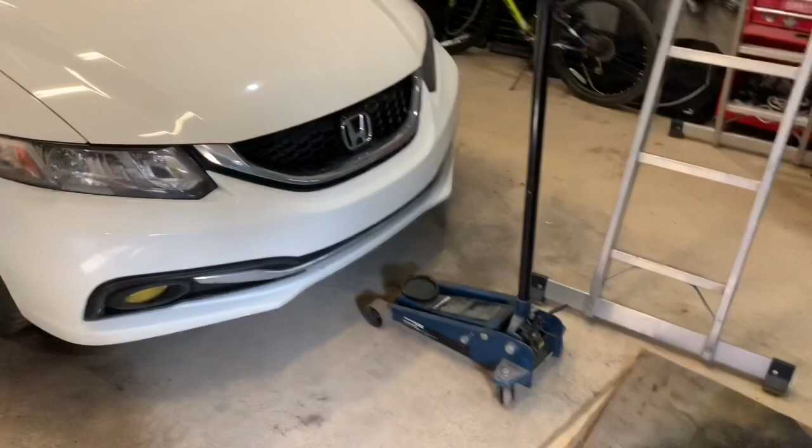So let's first, before we start, talk about jacking points and where we need to jack the car up. So we have different options. We could jack each corner up individually, get a jack stand underneath. Always use jack stands, guys. Don't rely just on your jack. Even if you're not going to be under the car at all, you don't want your car to fall on the ground and damage. Put a jack stand underneath.

So we can either jack up each individual corner, put a jack stand, but luckily on the Honda Civic, there is a jacking point underneath the car. It is made for jacking. And if you look at the splash shield, it has arrows pointing to it. So I'm going to go under the car with a flashlight so you guys can really see where it is. And that will allow us to jack up the whole front end of the car in one push of the jack. And then we could put jack stands under the corners. So let me show you that right now.

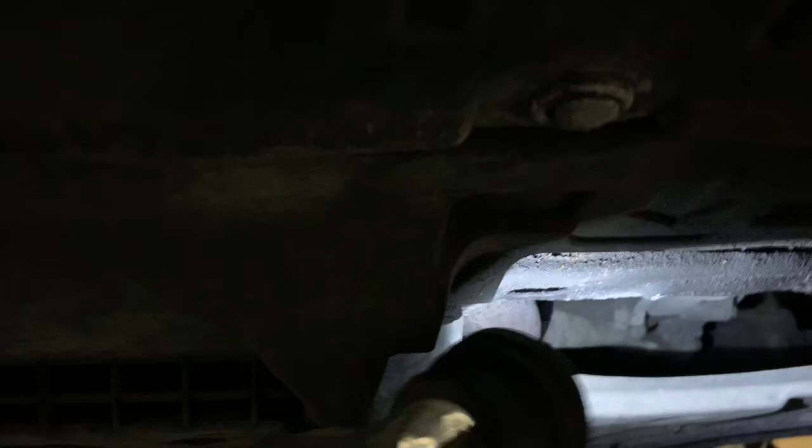Okay guys, so this is the front of the car, right? As we come right in the middle of underneath the car, you're going to look underneath. You see the plastic here? That's your splash shield. You go a little bit further down underneath. I'm going to try to put the light on it the best I can for you. We're going to show you where that jacking point is. And it is right here. Let me see if I can get it for you. There's a big piece of metal right here.

And if we look on the splash shield, sorry about the jittering camera, I'm going to try to get the lights for you here. If you look at the splash shield, you see that arrow? So right in the middle of the screen right now, there's an arrow on the plastic pointing to that piece of metal, which is right here. And that is a jack point. So we could put our jack right on that, center it on it, start jacking up, and the whole front end of the car will come up. So that's something good for you guys to know, so you could get the whole front end up and work on both wheels without having to jack up each individual corner. So let's save energy and do it that way.

Okay guys, so we have the jack under the car and we have it in position, but we haven't started lifting yet. What we want to do first is loosen the lug nuts. In my particular application, my lug nuts, and it should be stock for all Civics, are 19 millimeter. It's just a bit of safety. We don't want to loosen them when the car is up in the air. The extra force we're putting could cause the car to fall off the jack or the jack stands. Very unlikely, I don't think that would ever happen. You'd have to really shake it. But, you know, let's just play it safe.

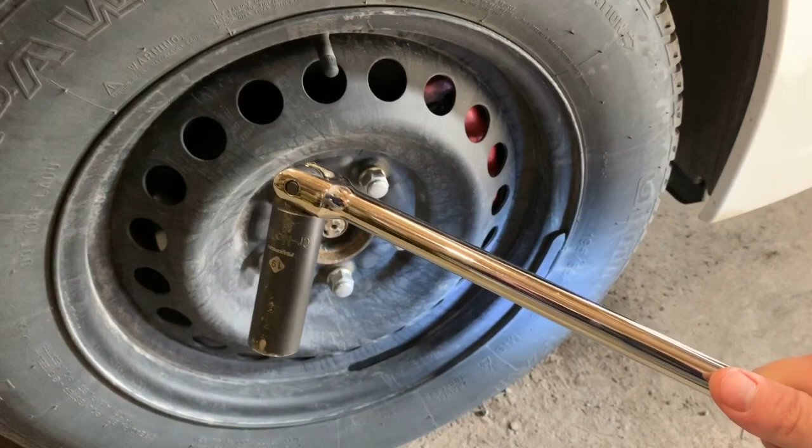So we're going to take our 19 millimeter socket. You could either use your impact gun or you could use a large breaker bar. I'm not pulling out my impact gun for a brake job. I don't mind using my breaker bar to break them free. And then I take my impact drill with my socket and zip them off quickly. So when we're loosening the lug nuts, we're not taking them off. Remember, the car's still kind of on the ground. We have it lightly supported by the jack, but we just want to loosen them up so we're not fighting with it when it's in the air. Like any time you remove or put on lug nuts, you want to do it in a star pattern. We don't want to cause any possible warpage of the rim.

If we start loosening, say, all the top ones and only the bottom ones are holding, it could cause it to bend. Once again, unlikely, especially when loosening, but this is the way we like to do it. So we do it in a star pattern. So we could start top. When we have 5 lug nuts, this is how you would do it: top left, bottom right, top right, bottom left, and then the bottom one.

So as long as you're doing it in a pattern that's opposing from each other, right? So you could do it this way, bam, bam, bam, bam, bam, right? Just the way we do it. So I'm going to go ahead and loosen both sides. Going to be working on both sides at the same time. And then we'll pick up the video and I'll show you what the next steps are.

So we have the car jacked up. Both wheels are off the ground. Like we said, safety first. So we're going to want to slide our jack stand underneath. So you're going to put that under the car. And you're going to see on both the front corners and the back, there's what we call a pinch weld. There's a little ridge that runs down underneath the car.

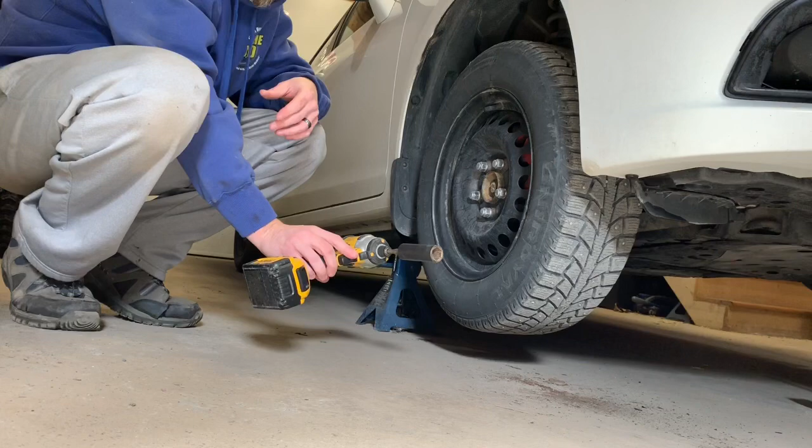Now to remove the wheel, we've already gone ahead and loosened it with the breaker bar. I like to use my impact gun with my socket on it. So you get yourself a socket adapter for 1/2 inch or 3/8 or quarter, whichever one you're using. And you put your 19mm socket and you zip off your lug nuts. I find this is the quickest way. I don't have to break out my pneumatic impact gun. Noisy, it's a hassle. For a job like this, not needed.

Now, these are winter tires. So here in Quebec, Canada, we have to use winter tires. These are my winter tires. And because it's winter, there's corrosion. So the tires sometimes don't want to come off easily. And that could also obviously translate to the brake components as well, but we'll get to that part when it comes. So if we need to remove the tire, sometimes it won't just come off. You got to give it a good kick.

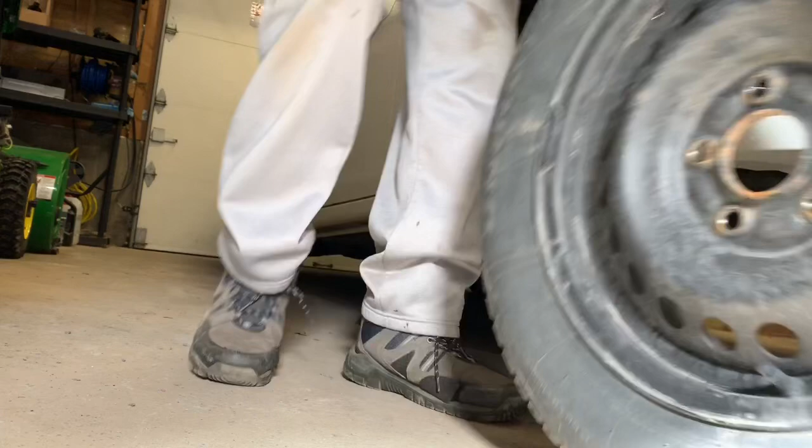So what I like to do is get in behind it, take my foot on the sidewall of the tire, and just give it a good smack. And it comes right off. Not as graceful maybe as I was hoping for the video, but she's off. And we can roll our tire out of the way. And now we'll take a look at the brakes themselves.

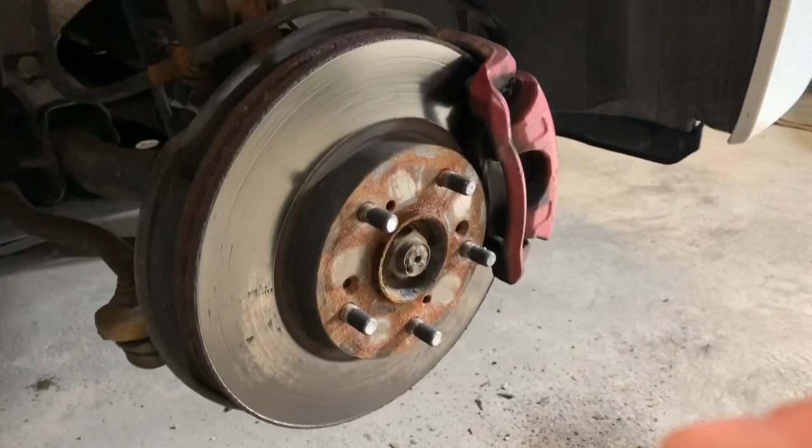So here's the brakes we're going to be changing. Here's the disc. So these brakes are 3 years old, and I'd say I probably got about 80,000 kilometers on these brakes. Maybe not 80,000, maybe 70,000. So could they live a little bit longer? I think I probably still have another summer in them. But you know what? I'd rather do it now. I'm in here doing maintenance anyways. Let's change the brakes now.

So the first bolts we're going to have to remove are the caliper to caliper bracket bolts. So these are these little bolts back here that screw into the caliper slide pins. These are 12mm. They're not torqued on very much. I think it's around 20 to 25 foot-pounds. Don't worry guys, all torque specs I'll be giving you when I'm reassembling. So you'll have all those torque specs.

So 12mm, we have one on the top and we have one on the bottom as well. You can see it right there. Camera doesn't want to focus, but it's right there.

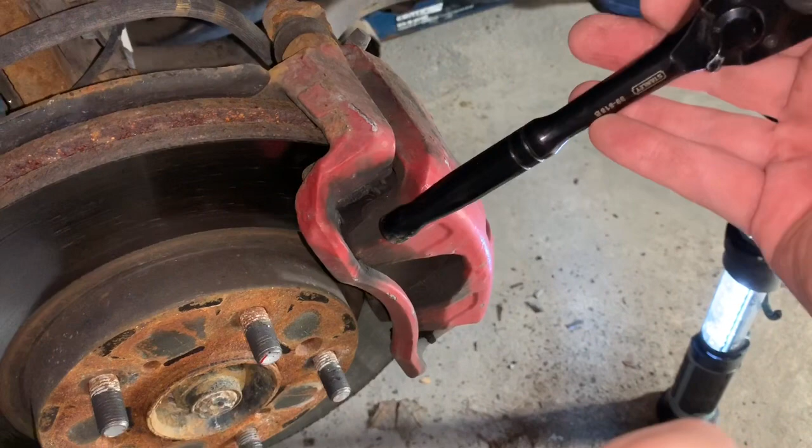So we're going to have to remove both of those, and that's going to allow us to swing the caliper up off the brake pads and the caliper bracket. So this is a caliper bracket. That's our caliper. Brake pads are in there. So once we undo those bolts, this caliper is going to swing right up.

Now, if we were just doing brake pads and not taking off the rotors, we could actually just undo the bottom one, loosen the top one, swing the caliper out of the way, change out our brake pads. But because we got to remove the rotor, we have to remove the caliper. We have to remove the caliper bracket to allow us to slide the rotor off. Okay. So we're going to go ahead and remove those two.

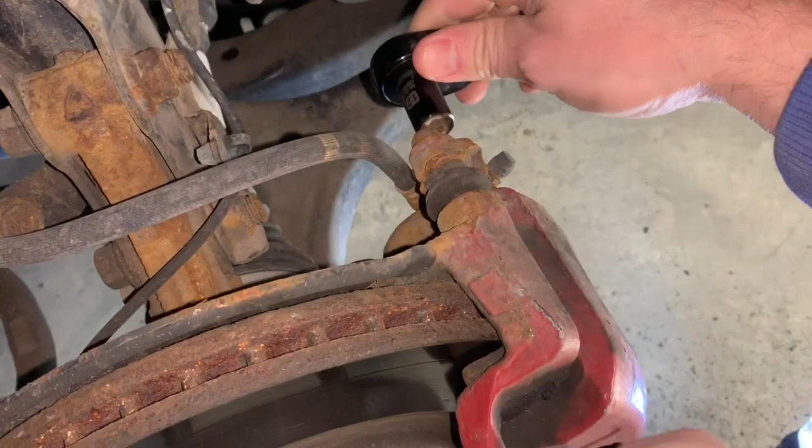So I always like using a 3/8 drive ratchet with the 12mm socket. But on the Honda Civic, you do have a lot of room back here. So you can use a 1/2 inch, 1/4 inch might be a little small, but they aren't torqued on very much. So you shouldn't have too much problem with them. So you just give it a little knock and she will loosen like that.

She's loose. Now, before you remove completely the top one, let's loosen the bottom one. Because if we remove the top and we try to loosen the bottom, the caliper is going to pull away and it's going to make our life difficult. So don't remove it, just loosen it, get it loose, keep it in there, remove the bottom one. So let me go ahead and remove those two bolts, and then I'm going to show you what you need to do.

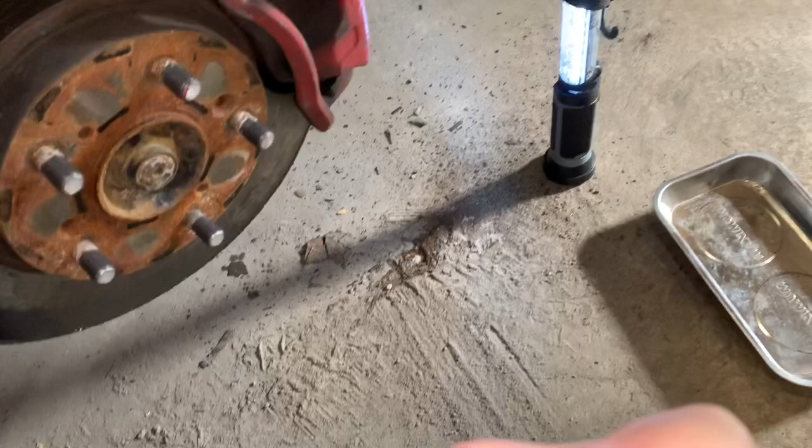What I suggest you guys get, if you don't have, is the magnetic tray. So you can put all your screws and fasteners in there so you don't misplace them. Trust me, if I was doing a brake job in my wife's car yesterday, things get dirty, a screw or bolt falls, it's easy to misplace, rolls away. Just get yourself a magnetic tray. I love mine, comes in very handy. So I'll be right back with you guys.

Okay, so those two bolts are out, and now we're going to be able to slide the caliper off.

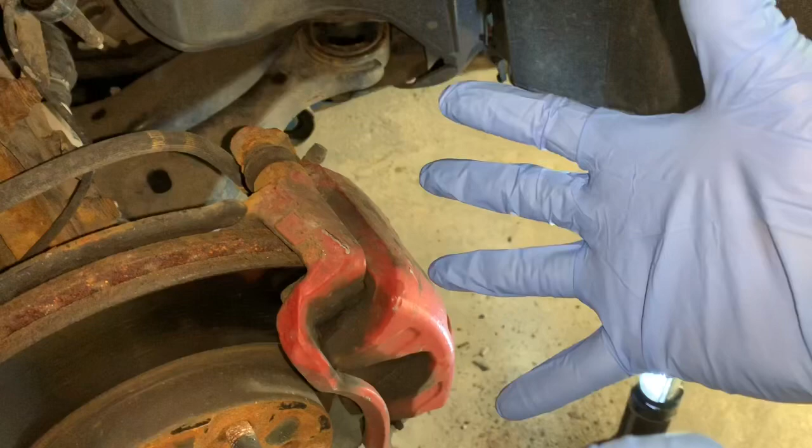Yes, guys, I'm wearing gloves. There's a YouTube channel I like to watch. He's a plumber. Steve, I hope I'm pronouncing his last name right, Laramere, I believe. I think he's out of Boston. Funny plumber. Love watching him, and he always wears gloves, and he always says, "Why do I wear gloves?" when he's changing a toilet and you see all that grime. That's why he wears gloves, and that's why I wear gloves, guys. I'm tired of years of mechanics getting my hands all dirty and greasy. It's not my full-time job. Don't want to go to work with greasy fingernails, so I wear my gloves.

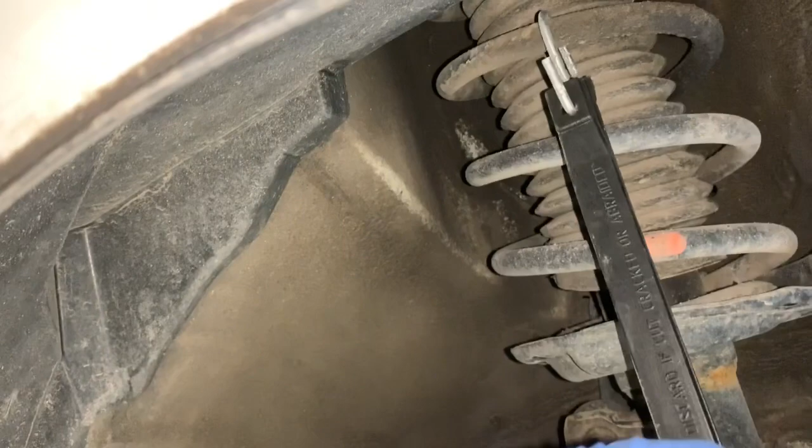So we're going to take this caliper and slide it up, pull it off of the brake pads and the caliper bracket, and get yourself a bungee cord to hang the caliper. Because once it's off, the only thing supporting it is the brake line. You don't want to leave it hanging from the brake line. That's not a good idea. So I like to take a bungee cord, get it up on the suspension spring, as high as you can. And then when we pull the caliper off, we could hang it from there.

So to get the caliper off, hopefully I can do this one-handed. And it's not going to let me, I bet you. Oh, there we go. Okay. Sorry, I don't know if you missed that. You pull it away. You see she comes off, right? And you're going to pull her off the brake pads.

It's free, okay? And what I like to do now is take my bungee cord and bring it in through here, or even through the hole where that bolt you took out is, and that'll hang it nicely, so it's not putting any tension on the brake line itself. So let me go ahead and do that. It's hard to do stuff one-handed, and my tripod's horrible. So I'm gonna go hang that caliper, and I'll show you what the next steps are.

So you can see the caliper's hanging from the bungee cord. There's no tension at all on that brake line. And that's the way you want to do it. So now that our caliper is off, we're going to remove the brake pads.

Before we do that, we have these two springs. Now in Hondas, it uses these little wire springs that go from one brake pad to the other. In case you don't understand how the braking system works, it's a floating caliper. Caliper floats, brake pads kind of just float. Once you let go of the brake pedal and the wheel starts turning, they release. And the velocity of the rotor turning spreads them kind of apart.

Well, these little springs help that even more to make sure the pads are not putting too much force on the rotor when you're not braking, as to not wear out the brake pads prematurely. So your new brake pads should definitely come with this. All the brake pads I've ever bought have. Maybe hold on to them just in case the really economy brake pads don't come with it. It's good that you have it.

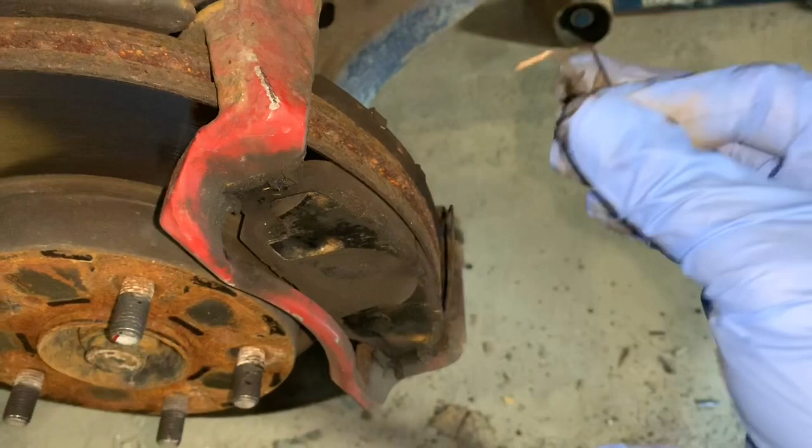Now, while I'm on this, we talked about economy brake pads. Now, I'm not one to judge. I know everyone's in different financial situations. But guys, this is the one thing that's stopping you. This is probably one of the most important components on your car. I don't know if you want to go too cheap on it. I'm not saying the economy ones are garbage, but they're $20 or $15 for a set of brake pads for a reason. Once again, just my opinion.

I'm not saying go out and buy the most expensive high-performance brake pads, but get yourself a good set of brake pads and a good set of rotors, good quality by a reputable manufacturer. Just my opinion. I like Raybestos, and I'll show you which ones I go with. And you guys make that decision yourself. But once again, I have my kids in the car, my wife in the car. I want to be safe. But just my opinion. I'm sorry if that offends anyone.

So with those wires off, we can now remove the old brake pads. And these come right off. And we could put those aside. That's the front brake pad. Rear brake pad comes off. And now all it's leaving us is the caliper bracket. So that's this big piece here. And it's going to be the same thing. We're going to have two fasteners on the back. So I'm going to stop the video. I'm going to bring the camera in behind so you guys could see what those bolts are.

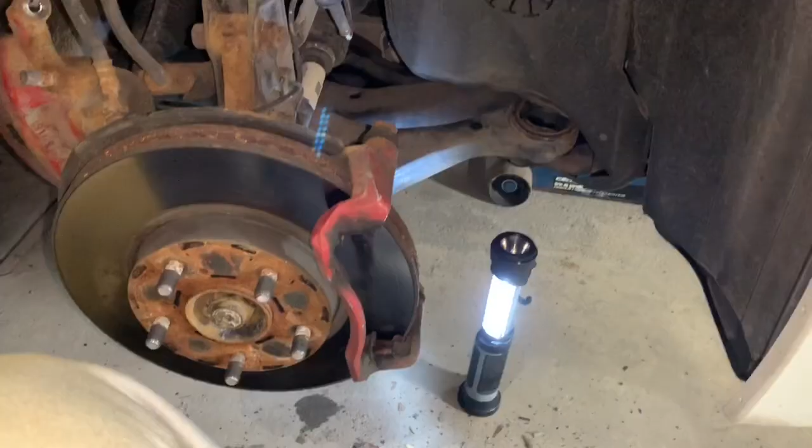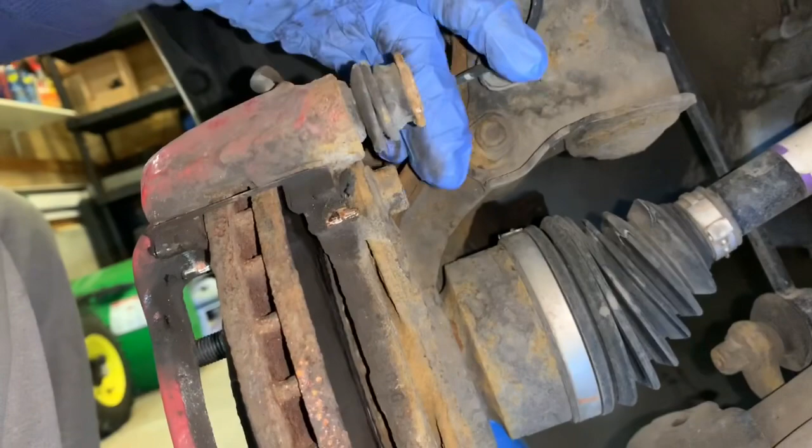Okay guys, I'm going to try to show you. I'm going to do my best to get my phone in behind there. I don't even know if it's going to see it. I don't even know what you guys are looking at because I can't see my phone, but hopefully you could see it. They are 17 millimeter bolts. There's one on top and one on the bottom right here. So we got to remove those two.

Now, those two bolts are torqued on. Once again, torque specs will be given on reassembly. I want to say at around 60 foot-pounds. They're on there pretty snug. So I like to use a 1/2-inch ratchet. It gives me a little more length on it. You could use a 3/8 if you have a longer 3/8 ratchet, like an 8-inch or 12-inch, to give you a little more leverage to really get those off. So I'm going to go in there now, remove those, and then I'll show you what the next steps are.

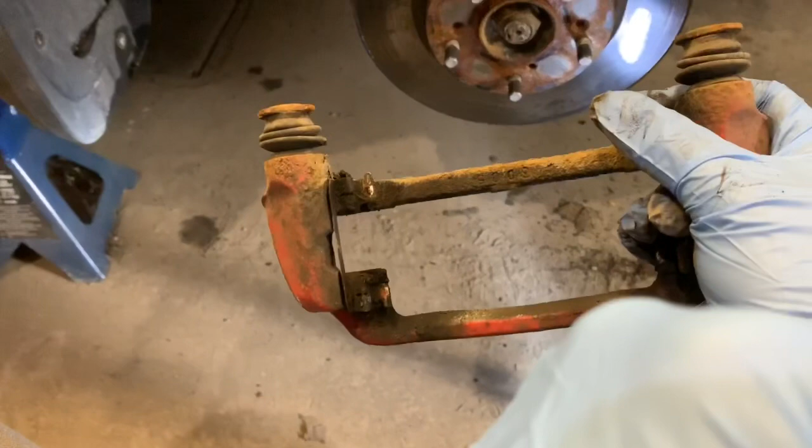Okay guys, so I removed the caliper bracket from the steering knuckle by removing those two 17 millimeter bolts. And here you can see the bracket. Later in the video, I'm going to go over how to disassemble it, service it, clean it, lube it up, but just basically so you can see what it looks like. You have your slide pins over here with your rubber boots. So those we're going to be removing, and I'll show you what needs to be done to those.

We also have our stainless steel shims where the brake pads make contact on the bracket. The stainless steel shim is there for a reason. If you had the brake pad ear, which is steel, on steel, which is the caliper bracket, corrosion would cause it to seize up. So you have a stainless steel shim that's in there. We put a little bit of lube as well. And that won't allow for any corrosion and will allow the brake pad to always move back and forth.

As you brake, move it in to brake. As you release, move it away. It allows it to slide easy. So that's why you have those shims. Once again, a good quality brake pad will come with the shims. If not, definitely keep these. Usually they're not in bad shape. If you clean them up, you could definitely reuse them. But anyways, I'll go over later in the video how to go about cleaning this, taking it apart, putting on the new components. So I'll put that aside for now.

So once we have the bracket off and the calipers off, the only thing that's left in our way now is removing the rotor. There's nothing else holding the rotor on. Now, I've changed these brakes before, so I don't have any retaining screws. From the factory, there are 2 Phillips head screws that basically go through the brake rotor into the hub, the back of the hub. Now, why are those there? Pretty much for assembly. When they're assembling the car, so they don't fall off as it's going down the assembly line, they put those little Phillips screws.

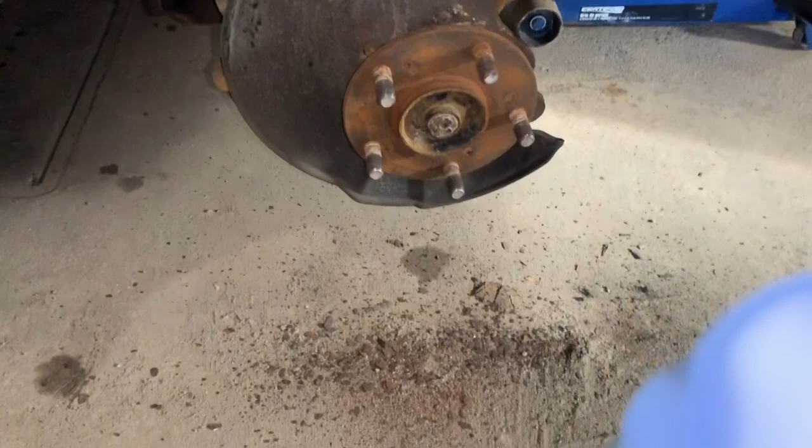So I'm going to put the camera down and I'm going to show you guys how I get it off with a hammer. Hold on, this is going to be fun. Sorry guys, I thought I pressed record and I didn't, so you missed me hitting the brake rotor with a hammer. Probably nothing entertaining anyway, so you didn't miss much.

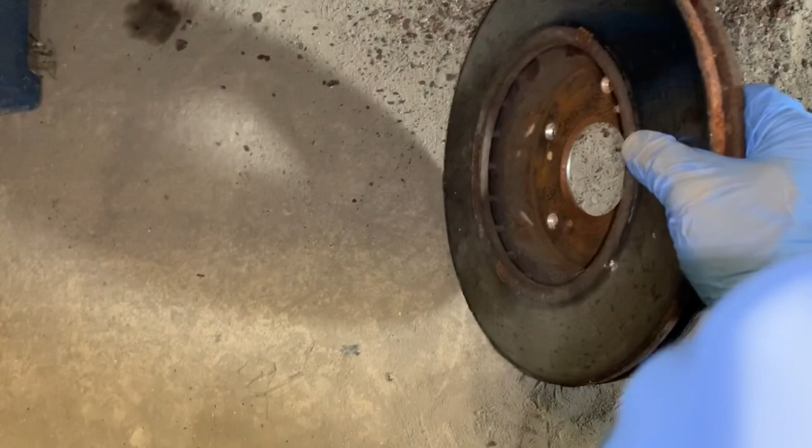So the brake rotor is off. You can see the hub and the wheel studs and the dust shield in behind. And here's our rotor. And I'm not going to lie, this one was a pain getting off. Not the worst one I've had, but it was a pain. And the reason that was is because if you look on the inside, you can see there's all that rust, right?

So if we look at the hub, which is right here, this fits almost perfectly inside that top hat of the brake rotor. So as this rusts and becomes bigger because of rust, it makes like a lip of rust. So when you're trying to pull the rotor off, it's kind of like fingers on here, grabbing it, won't come off.

So I did my technique, like I said, you hit it with a hammer in between the studs, put your lug nuts on not to damage your stud, to vibrate it, to shock it loose. It came loose, but I wasn't able to pull it off because of that ridge of rust holding it on like fingers basically. So what I had to do is keep knocking.

And then what I did is, because we have this big empty space here, from in behind, I would give it a couple of taps, turn it a quarter turn, give it a couple of taps, and basically slowly press it off from behind. So in this example, those two threaded bolts through the top hat of the rotor, pushing against here, basically pulling your rotor off, would have been a good solution.

But it worked well for me. Just tap, tap, turn, tap, tap, eventually slowly working it off until it broke free of all the rust and it fell off. So what you want to do now, there's not much prep to do here, but what I like to do, sorry if I'm shaking the camera, is clean the hub.

So take a wire brush and get a lot of this rust off. There's not much, but still get it off. Go around here from the lip of the hub, clean it up. You could even use a pneumatic die grinder with a wire brush, which is what I'm going to use, or just a hand wire brush, and clean up this surface here and even the mating surface.

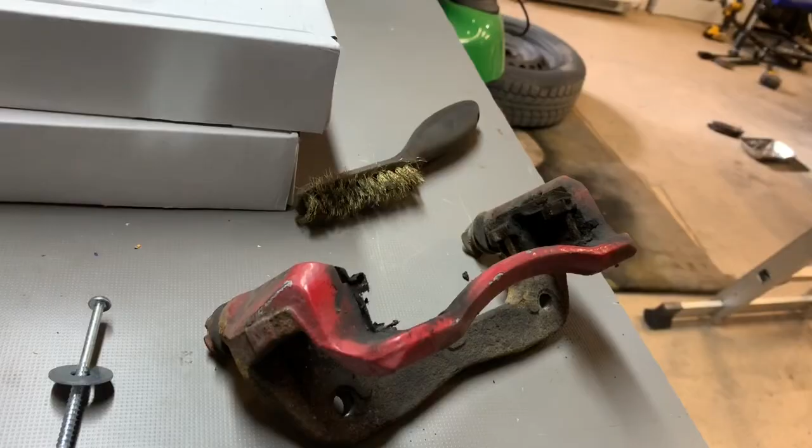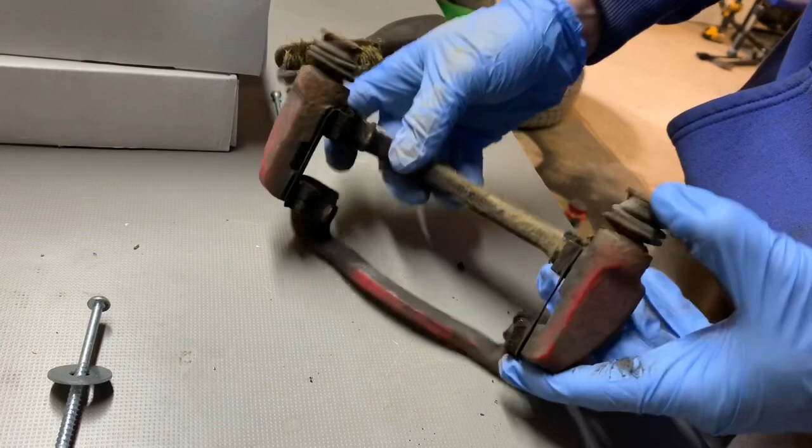Okay guys, so I cleaned up the hub and the mating surface where the rotor goes. And now we can concentrate on the caliper bracket and the components that are on it. So here's our caliper bracket. So the first thing we can do is remove these stainless steel shims. Like I said, if your new brake pads don't come with these, keep the old ones and clean them up.

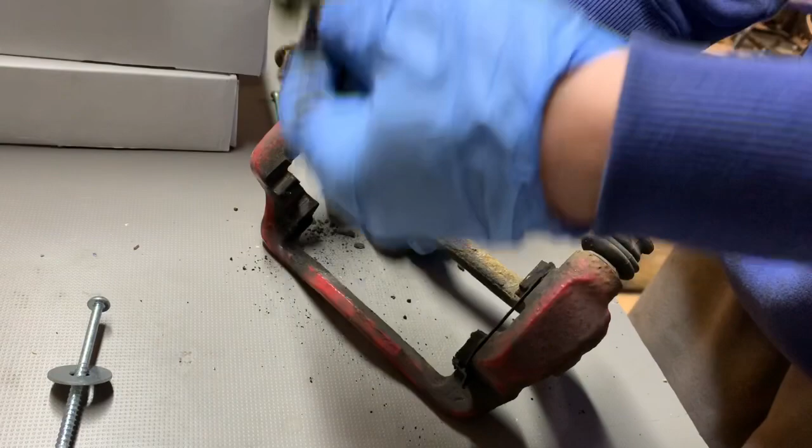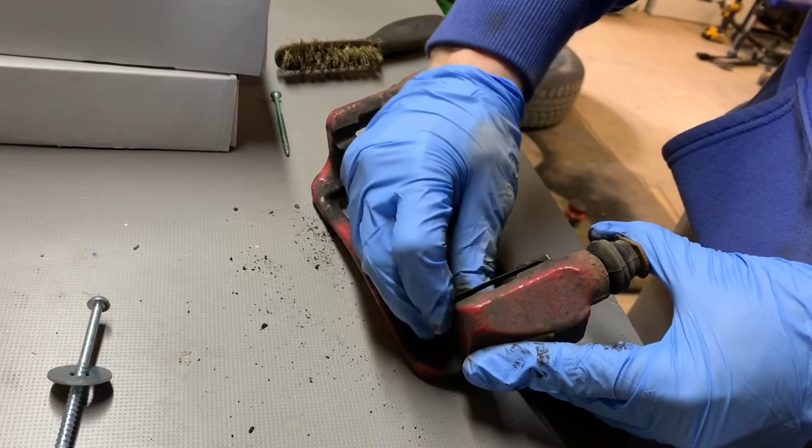But every brake pad I've ever bought comes with them. I can't speak for the super cheap brake pads. Maybe they don't. So keep them aside just in case you do need them. So there's a shim on the top and the bottom of the caliper bracket. So you're going to remove those.

And what I like to do next is clean up these surfaces, where the shim sits on. There is always a little bit of corrosion there, a little bit of grime, which could cause the shim to sit higher than what it's supposed to. If the shim sits higher than what it's supposed to and the brake pad sits in there, and it's already a tight tolerance for brake pads to cut down on noise, it could cause the brake pad to bind.

You might have trouble getting it in when you try to slide it into the bracket, or when you're braking, it might cause it not to move as freely as it's supposed to. So I like to clean up these surfaces. Just a wire brush, you go in there, give it a good cleaning.

Now, I do a brake service once a year. Well, technically I do a brake service twice a year. Every time I rotate my tires or change over my summer to winter tires, I re-lube all the brakes. I don't dismantle everything twice a year because that might be a little too much.

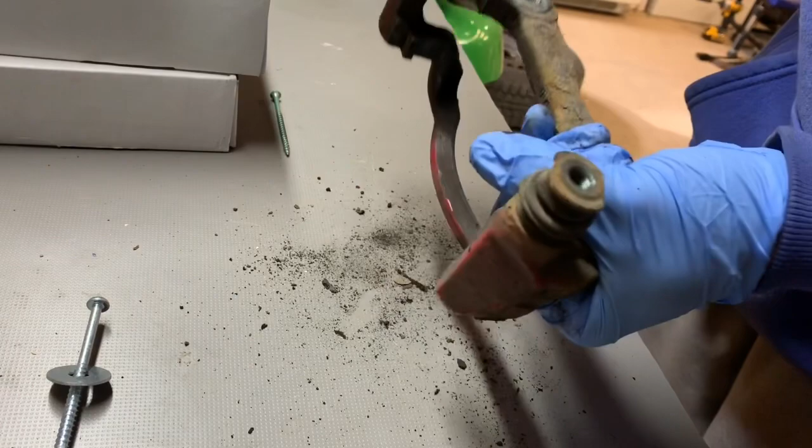But what I do once a year in the spring, if I'm not doing a brake job, I remove all this stuff. I remove the bracket, I remove the shim, keep it aside because I will be reusing the shim in that scenario. And I clean up all the surfaces, just get everything nice and clean. Like I said, here in our climate with all the grime and crud in the winter driving, it could cause issues building up on the brakes.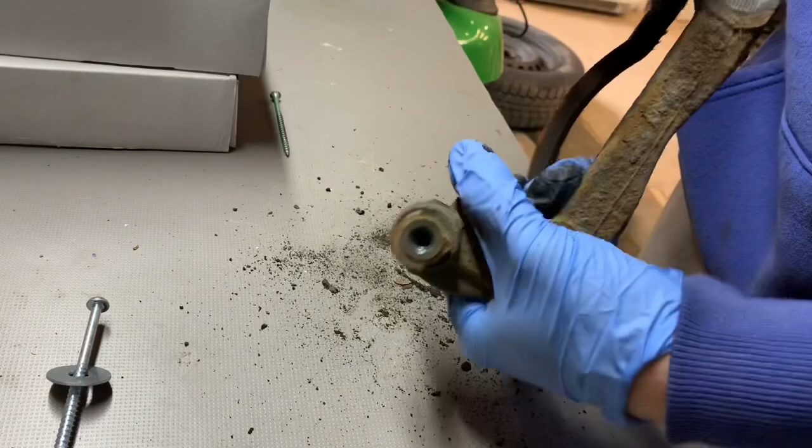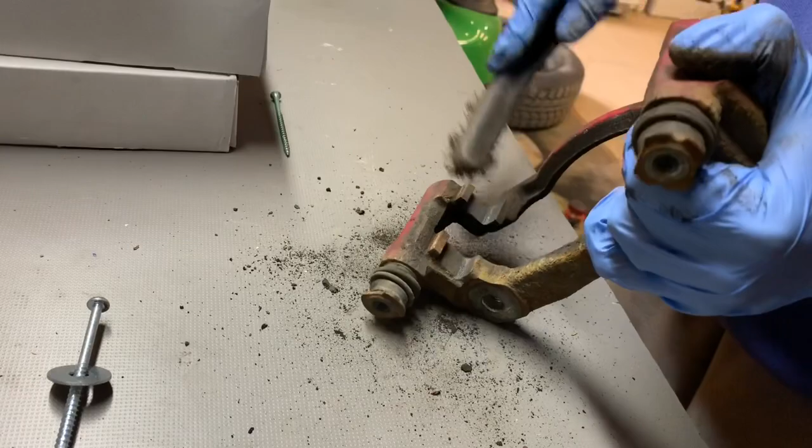As you see, a lot of people have seizing brakes, they have to go to the garage. Their brake pads might still have a lot of meat on them, but they need to be changed because their brakes seized up and it caused the rotor to be damaged, the brake pad to prematurely fail, say the inner pad might wear out a lot more than the outer pad. So by doing a little bit of brake maintenance once a year, well, twice a year, but a big maintenance once a year, it'll save you that hassle.

So just with the wire brush, cleaning up that surface, and you can see now that it's nice and clean. And once we do that, the next step is our guide pins or sliders. So you can see there's a rubber boot over here. So we pull back the rubber boot, and that frees up that guide pin or slider, allows us to pull it out.

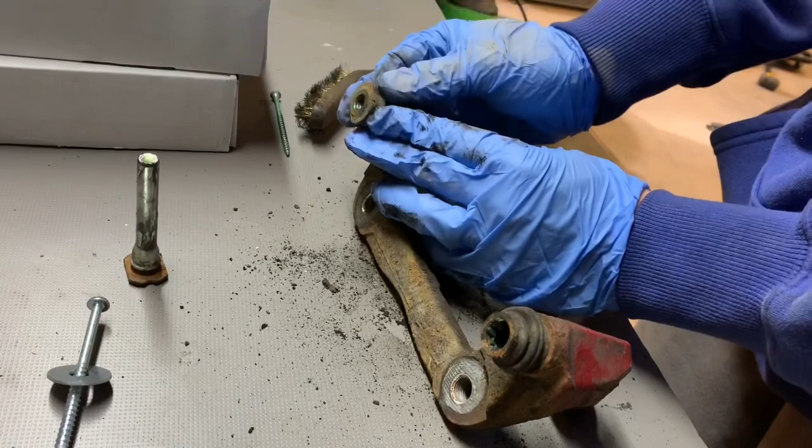So there's the bottom one. It's bottom, right? Yeah, it's the bottom one. And now we're going to do the top one. We're going to slide it out. Now the top one's going to be a little bit harder to pull out. And I'll show you why.

Because on the top one, you have a little rubber bushing, I guess you could call it, on the end of the pin. And that's to cut down on noise. Because it's a floating caliper, basically it acts as a buffer, so the caliper is not shaking inside the bracket and could make noise when you're braking or even when you're just driving, going over bumps. Does it really cut down the noise that much? I don't know. But that's why it's there.

The problem is with this rubber, it doesn't like caliper grease, brake grease. It swells. And as you put brake grease on, this bushing swells and could actually cause the pin not to move freely inside. So something to keep in mind, these are changeable. So you could buy a kit. I don't think you could buy just the bushing, but it comes with the boots as well. I think it's like $10.

I think probably for both calipers that you could redo it. I just redid it last year, so I'm not going to do it again. But it comes with new boots, new bushings. The guide pins are pretty much good for life, unless they get damaged for whatever reason. Normally you don't have to change them, so you don't have to worry about that.

So we're going to take out our guide pins, and we're going to use some brake cleaner with a rag. We're going to clean up that surface, get all the old brake grease off. Another thing I like to do is spray brake cleaner into the bores of the brake caliper bracket where those pins slide in to remove any old brake grease, any grime that's in there, get it nice and clean.

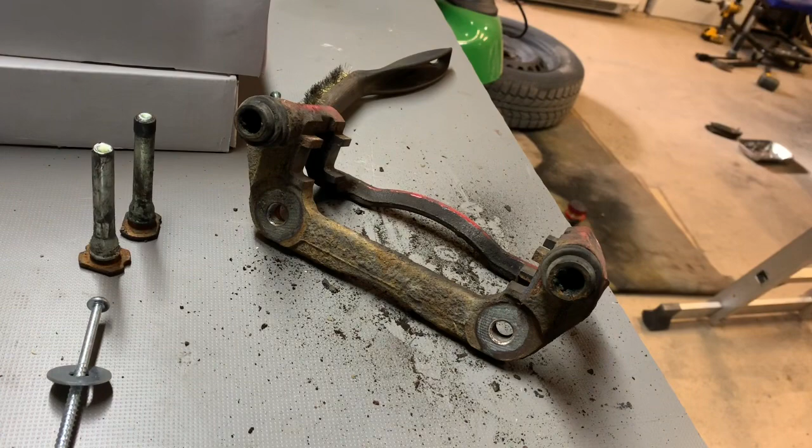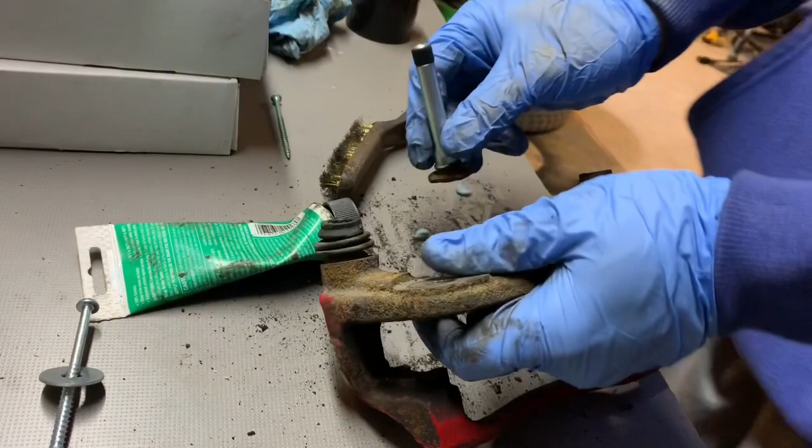Okay guys, so I've gone ahead and did as I said. I cleaned up the slide pins with brake cleaner, got all the old grease off. So both of those are clean. I as well cleaned out the bores of the brake caliper bracket, got all that old grime out. So now we're ready to lube up those pins to put them back in.

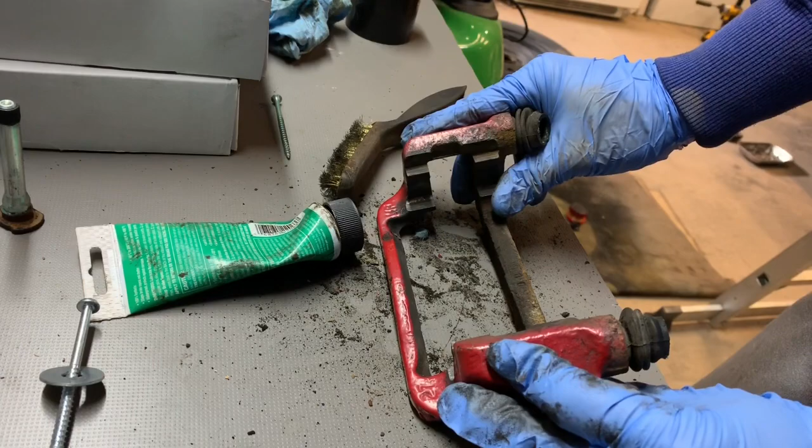Very important you use the right grease. You can't just use any regular grease like wheel bearing grease or general purpose grease. It doesn't have the heat capacity that's required for brake components. You need a high heat brake grease that won't liquefy under extreme heat. These brakes get really hot. You put a wheel bearing grease or an all-purpose grease, it's just going to turn to liquid. So you got to get yourself a brake caliper grease.

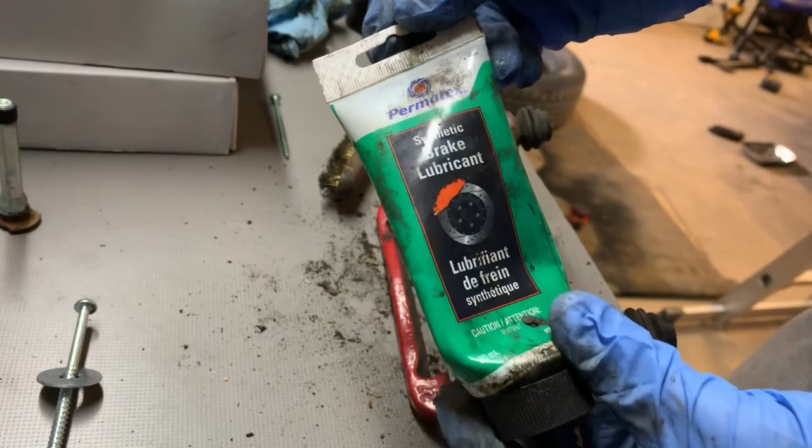I use a synthetic one. I use the Permatex, been using it for a long time. Comes in a little tube. I wish it came in bigger. I used to get it in a big tin. I can't find it anymore. If you guys know where I could get it in bigger volume, please let me know.

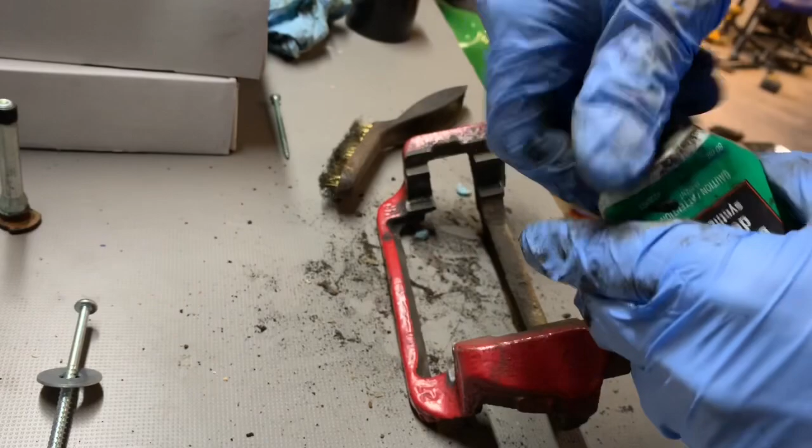So I use that. So what I like to do is I take my guide pin, take out a little bit of grease. You don't need much. Some people like to really over grease these things. Just put a little dab on your pin, then use your finger and spread it out evenly over the whole pin. Get all the surfaces.

And then what you're going to do, so we said the bushing's on top. Now, does it matter if that bushing's on top or the bottom? That's a good question. Don't think it does. Let me know in the comments if it does matter or what your opinion is. I always just put it on the top because that's where it always is when I do a first brake change on a car. So I'm just going with that theory, so to speak. So we know on this car, this is the top.

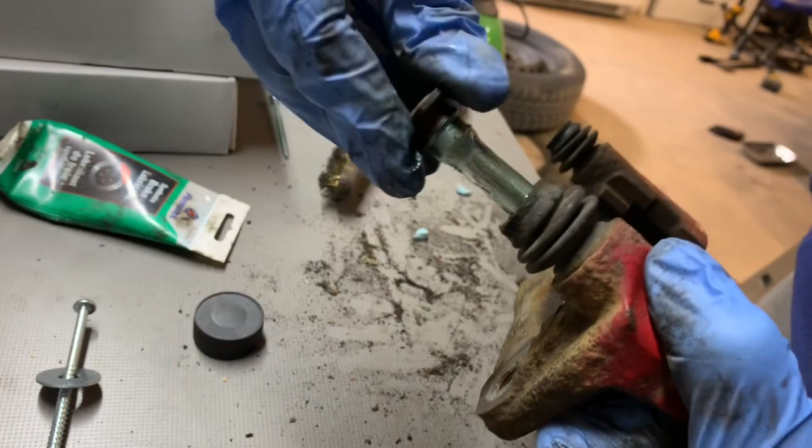So we're going to take our pin and we're going to slide it in. As I slide it in, I like to turn it a bit too, just to get that grease all over. And we slide it in and we push it all the way down. So you can see the tight seal that's in there. See, when I push it down, it wants to come right back out because the grease is basically forcing it out, not allowing the air to push through. So push it down and it's going to cause the rubber boot to reseat.

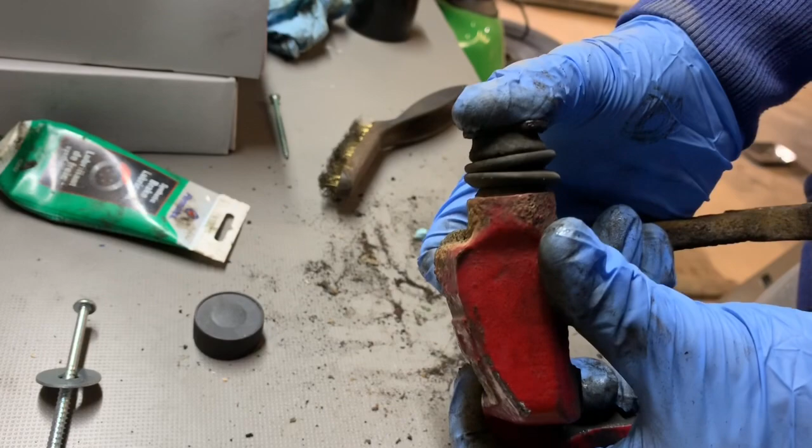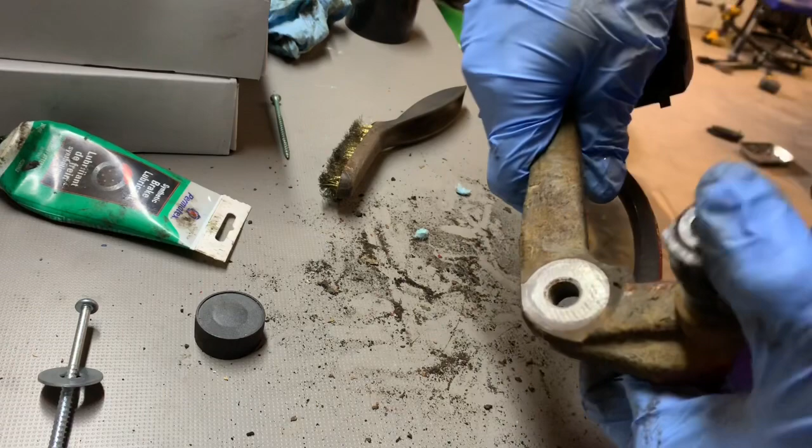There's like a little lip on the pin. See, if you look on the pin, there's a little lip that the boot sits into. So you can see there we go. We got it all nice and in. And now we're going to do the same thing for our bottom pin. We're going to lube it up, and we're going to stick it in. So I'm going to go ahead and do that, and then I'll show you what the next step is.

Okay guys, so we're going to now take our new shims that came with our brake pads, and we're going to put them in place. So there's no top or bottom, they're universal. So you're going to seat it on as such, and you're going to basically push down. So you're going to press it into place as such. You can kind of hear it, this clips in.

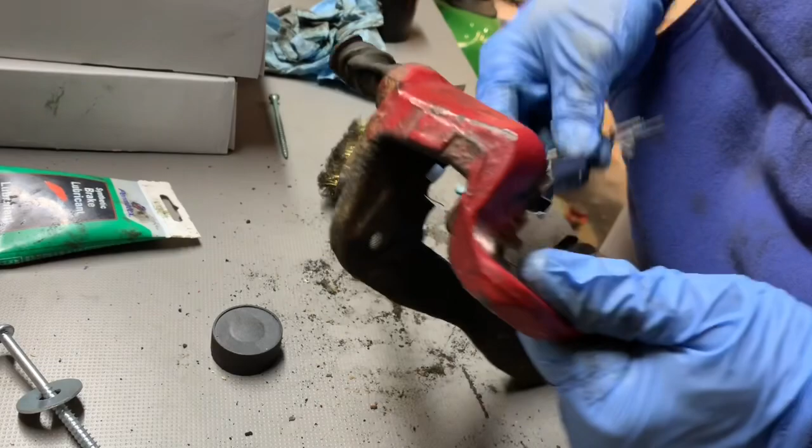And you're going to seat it in like that, and you're in. And now you're going to take your other one, and you're going to do the same thing on the top or bottom, depending which way you're looking at it. And you're going to push it down, and you hear it click in place, and you're in.

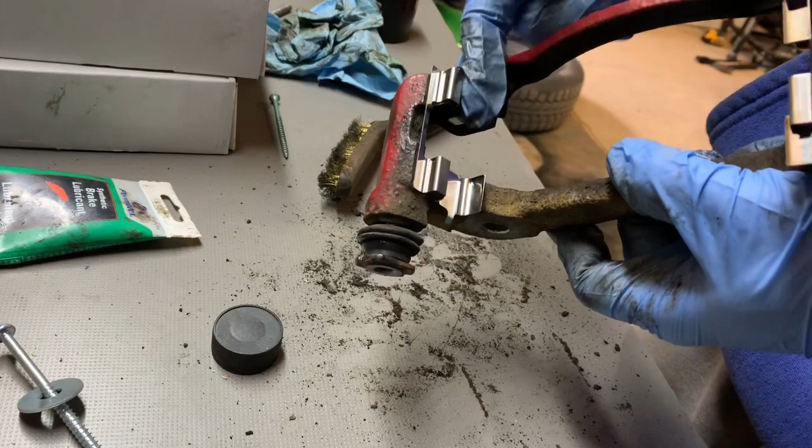Now what you could do is you could take a little bit of your brake grease, and you could lightly lubricate the surface of the shim inside the recess part, on the side walls, the little raised part. This is where the brake pad ears make contact. You want to have a little bit of lube there. You either put the lube here, or you can put the lube on the brake pad ear. Same thing will happen. I like to put a little film on the shims themselves to make sure they're well covered. And then I could slide my brake pads in.

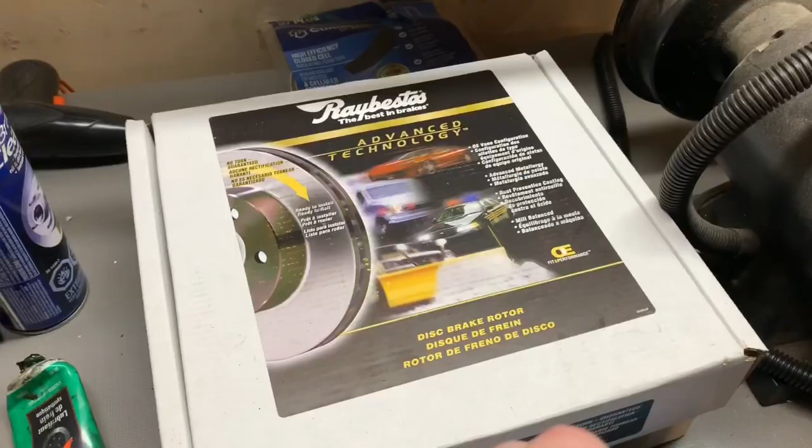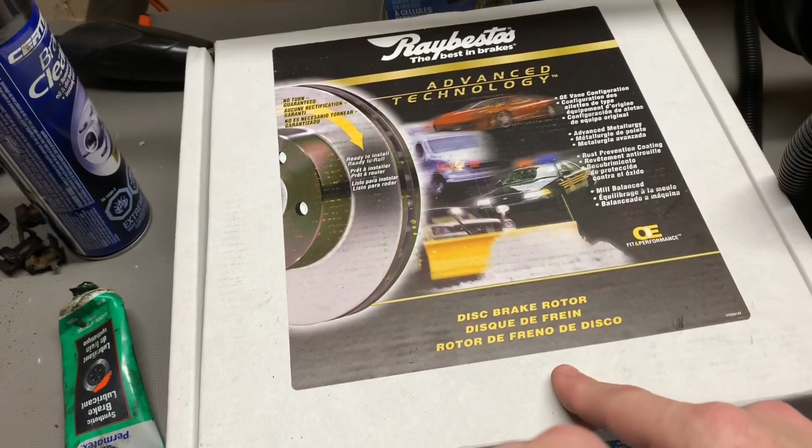So I'm going to go ahead now, and we're going to go back to the car, and I'm going to put the new rotor on, and I'm going to show you what brake components I purchased. So when we look at what brake components I purchased, once again from Rock Auto, I like Raybestos, and not the entry level, but more of the premium level brake parts. This is their advanced technology brake rotor.

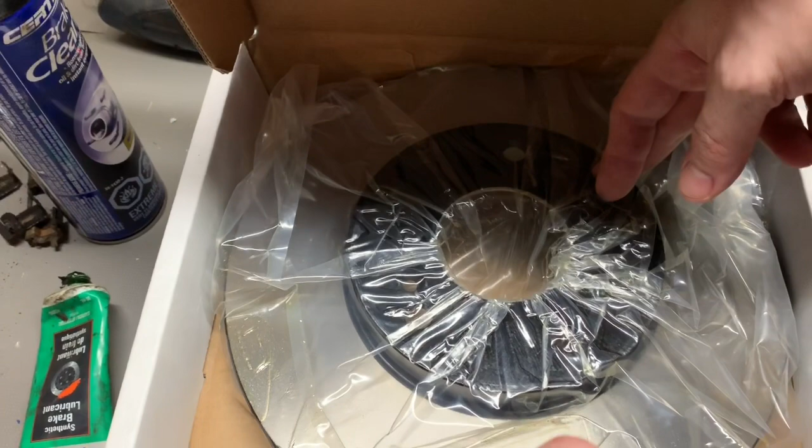So it has the coated top hat. So any part that's not braking surface is coated with rust inhibitor, and it's almost like a paint. It's nice and black, and it won't rust. It'll always look nice. So I like that technology. It has it on the outside of the hat, the inside of the hat, and even on the leading edge here, so you don't get all that crappy looking rust. And that also helps to make it easier next time you have to take it off. I think these were $50 Canadian a piece plus shipping. If you go to your local parts store, they're probably over 100.

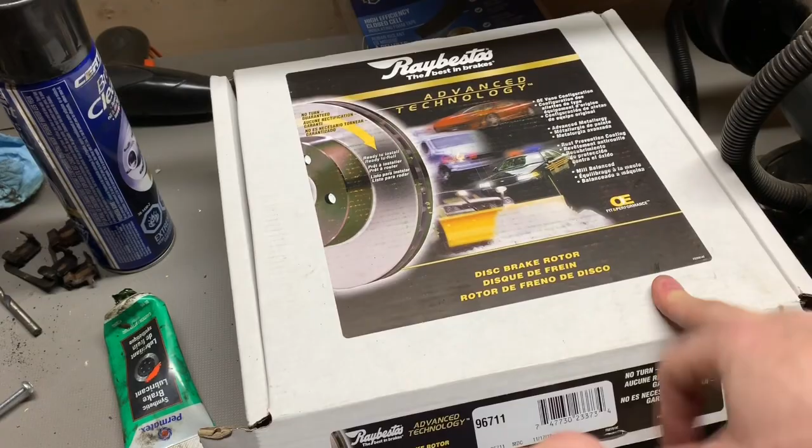I wouldn't be surprised. Brake pads, Raybestos again. I really like the Element 3. I've been using them quite a few times now with great success. They don't wear out prematurely. They're not noisy. I just like everything about them. They come with all the parts you need. They come with multiple shims. They come, like in my case, with those little wire spreaders we were seeing when I took the pads off. And I want to say these were about $40 Canadian plus shipping.

Worth the investment. They're not expensive. And really, I really like them. I've used them now twice on my car, twice on my wife's car. On my previous cars, always had great success with them.

So we're going to be putting the new brake rotor onto the car. Before we do that though, we need to clean it. From the factory, it comes with an oil film on it to prevent any kind of corrosion. So you need to wipe that off. So you take some brake cleaner, spray it, take a shop towel, wipe it off before putting it on the car. So the new rotor is cleaned, both sides, all surfaces with brake cleaner. Get all that oil off, and I've put it into place.

So the next step now is basically we're going to reverse what we did taking everything apart. So the first step we're going to do is put the brake caliper bracket back on. So we have those two 17mm bolts that we have to put on. Those are going to be torqued to 80 foot-pounds. Now what I suggest you guys do for torque specs, right? I mean, I'm putting it on the video so you guys don't have to research it. But here's what I did.

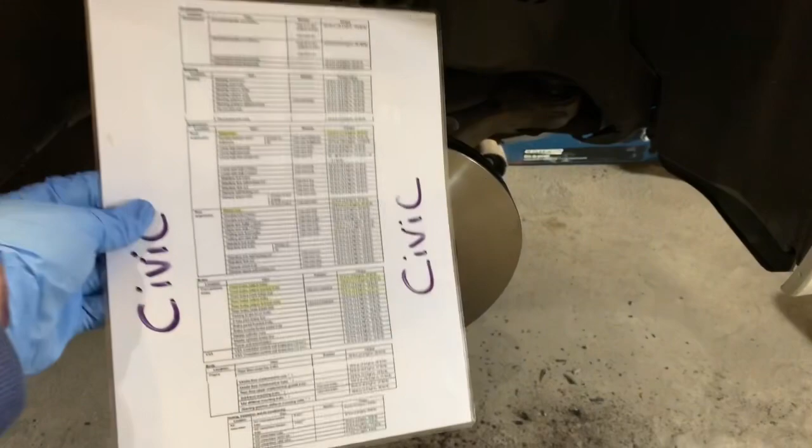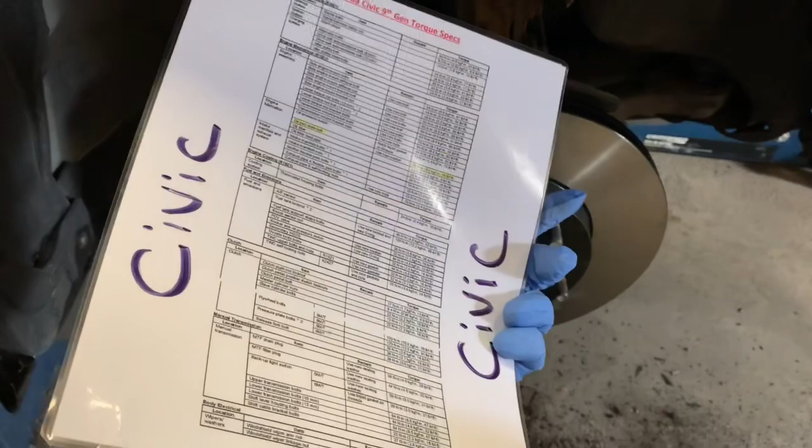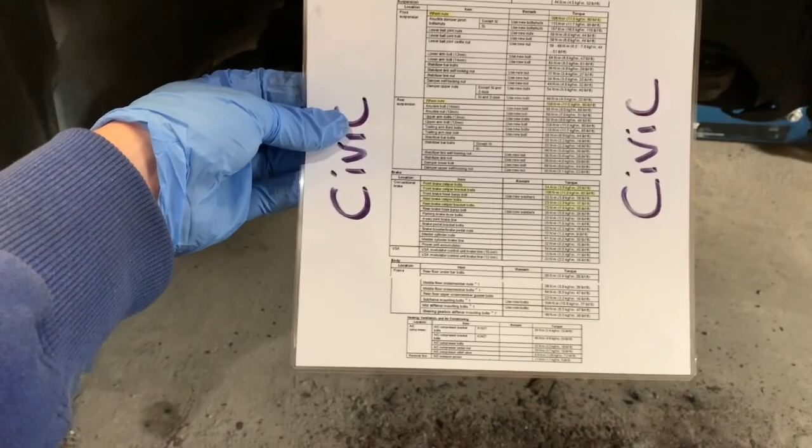I made myself a template, a laminated paper, it says Civic on it, because I made one for all my different cars with all the torque specs you could imagine. Look at all those torque specs, right? So most of them I'm never going to need, but I just copied and pasted them from online manuals. I highlighted in yellow the ones I use the most, so brake components, wheel nuts, oil pan, and such. So it's always on hand, readily accessible. I could look at it right away, and I know what torque spec I need to use.

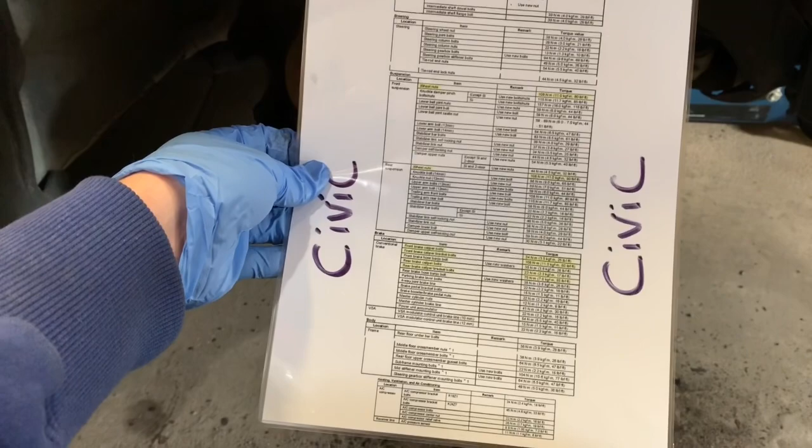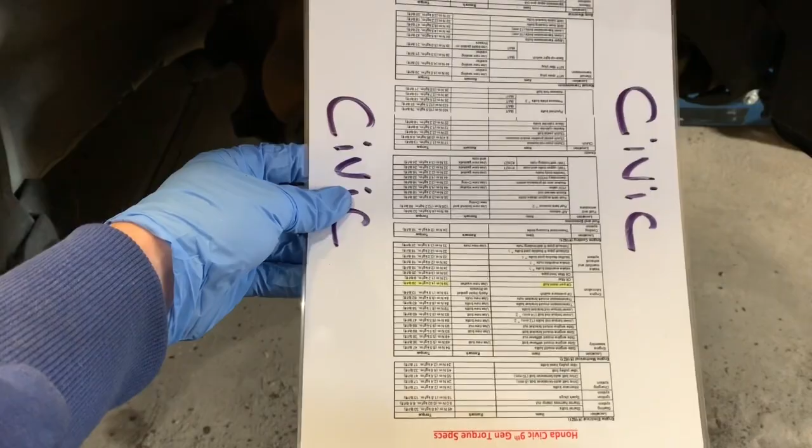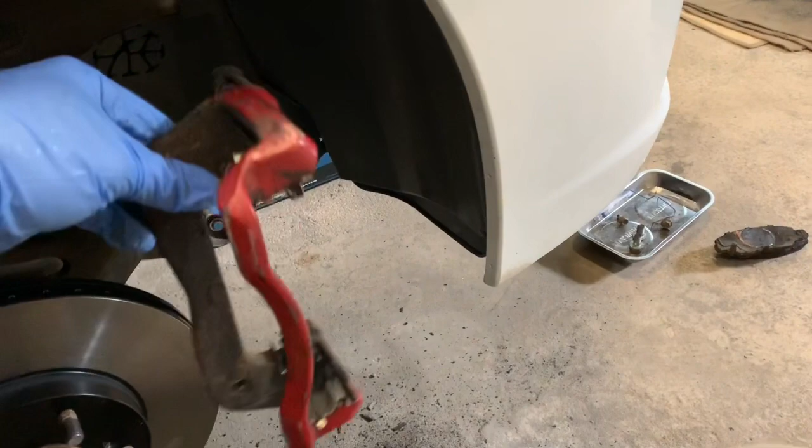So for the Civic, it'll be applicable for 9th generation. I can't say if it's applicable for 8th generation or not, but definitely 2012 to 2015. It's very handy to have. So we're going to go ahead and put that brake caliper bracket back on. It's basically the reversal of how we took it off. We're going to slide it into place, take our 2 bolts in the back, and we're going to torque it on.

Now, while we're on the subject of torque, guys, get yourself a torque wrench. If you're doing any kind of automotive work, get a torque wrench. If you don't want to get a torque wrench, don't do automotive work. I'm sorry. I know some people aren't going to agree with me, but when you're talking components like engine components, brake components, you want it torqued to spec. I don't care how many years you've been a mechanic.

I've been doing auto mechanics for many years now, not as a profession, but still doing a lot of it. My hand is not calibrated. I can kind of get it close for stuff that's not essential, but I always use my torque wrench, especially on brake components, oil pan, spark plugs, right, guys? Just make the investment. If you're going to save the money by not going to the garage, reinvest it in your own home garage and get some proper tools.

So I'm going to go ahead and put that on. So once again, that's your caliper bracket assembly to your steering knuckle, the two 17mm bolts, torqued to 80 foot-pounds. Okay, guys, so our caliper bracket is on. It's torqued to spec. And now what we're going to do is put our brake pads into the caliper. So when we look at our brake pads, we obviously have 2 brake pads.

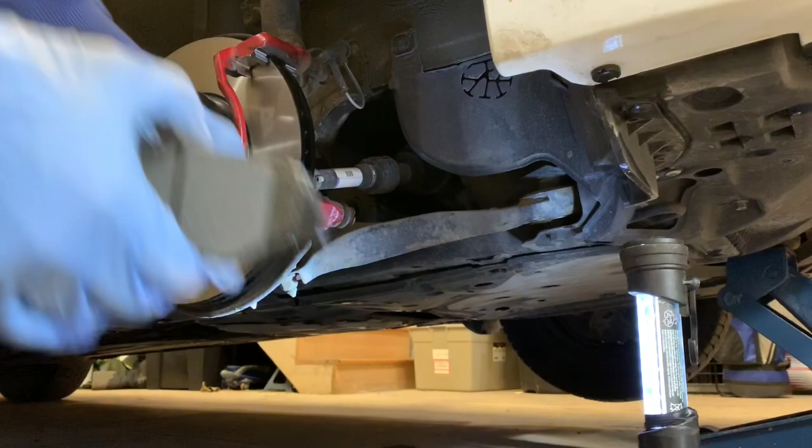Well, one is going to have a wear indicator. So there's a little tab. That's your inside pad. It's just the way it is from the factory. It goes on the inside, I guess self-explanatory. And then your other one is your outside pad. Now, what's nice about these pads is they have these nice stainless steel shims on the back. I still like to put a light layer of that high temp grease on this shim just to cut down any chatter that might be there.

There shouldn't be any, but still, a little bit of grease will cut down any little bit of noise you may have, whether that's through brake vibration or just through brake movement. I've always done it. I've never had brake noise. You could try not doing it, let me know what it gives you. So we're going to take our brake grease. Like I said, I put a little bit of grease already on the inside of the shim, but I also like to put a little bit on the tab as well, the ears of the pad.

So we get a little bit of grease out, and we put a little bit of grease there. You can actually use the tube as an applicator. Just lightly grease. You don't need too much grease, because remember, the more grease you put, it's just going to be a magnet for dirt and grime, and you're going to build up more of that sludge that can impede movement. So actually, the grease could hurt you if you put way too much. I've seen people over grease so much, it doesn't require much.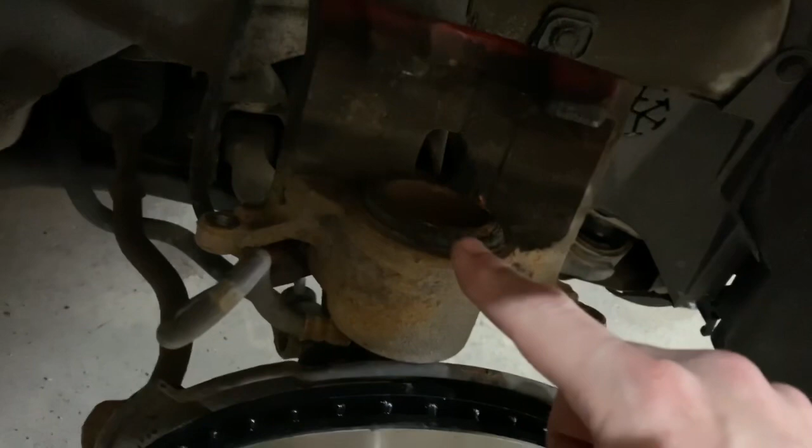Now guys, I forgot an important step before I go put the caliper on that I want to talk to you about, and that's the caliper piston, right? So that's your piston right there. It's that little cup. And when you push the brake pedal, brake fluid gets pushed through the line and forces that piston outwards, putting pressure on the pad.

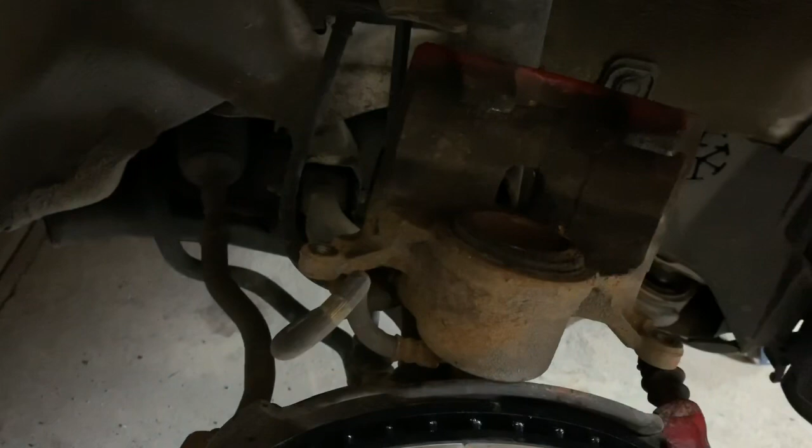Now, as your brakes wear and get older, that piston in its resting position, when no brakes are applied, is further out because the pads got thinner. Therefore, they're not as wide. So the piston comes further out in its resting position. Now, when you put new brake pads on, they're full width. So if you try to slide that caliper over, it's not going to fit. You need to push this piston back into its bore to full opening to be able to slide them over.

So that's a point that's always a big discussion for most people, is how do I do it? I use a C-clamp. You could use a very big pair of channel locks as well. I like to put the C-clamp over top the piston on one end, and then from the bottom over here, not on the line, but on the flat part of the bottom of the caliper, tighten the C-clamp and push the piston back in. You could also use big channel locks if you have big enough ones to force it back in.

Now, do you just push the piston back in, or do you open the bleeder screw, the bleeder valve for the brake fluid? That's a big point of discussion for most people. People say that by pushing the piston back in, you're reversing flow. Any corrosion that's in that caliper will be forced back into the system and into the brake line. It could put excess pressure on the brake system.

So a lot of people prefer to open up the bleeder screw and relieve pressure as you're pushing the piston back in. Some people don't. They just keep the bleeder screw closed and push the piston back in. Now, if you're going to leave the bleeder screw closed, I do strongly suggest you open up the brake fluid reservoir cap. So we'll see where that is on the Honda Civic. It's right there. Because as you push that piston in, fluid's going to be forced back through the system and back into the reservoir, right?

Well, you need now to open up that reservoir to alleviate the pressure in the system, allow the air to escape because you're backfilling with fluid, and not to put too much pressure. Can you leave the cap on? I guess you could. Like I said, I don't recommend it. If you're not going to open the bleeder screw, leave the cap off to allow excess pressure to vacate. If you're going to open the bleeder screw, then you don't really need to remove the cap because the excess fluid comes out of the bleeder screw and the pressure is relieved that way.

So I'm not going to tell you guys which way I do it because it's such a big point of discussion on message boards, on forums. In my opinion, both are okay. Both are not okay. Depends how you do it. Make sure you're doing it right. If you open the bleeder screw, you should be bleeding the brakes after. Some people say you don't have to because you're backflowing.

So as soon as you finish pushing that caliper in, if you close the bleeder screw, no air should have got in. In my opinion, anytime the system is opened in any way, meaning a line disconnected or a bleeder screw open, you need to bleed because there is a chance air got in, and most likely it did, even if minute. So I'll let you guys decide which way you want to do it, and we'll leave it at that. So I'm going to go ahead and push that piston back in and put the caliper back in place.

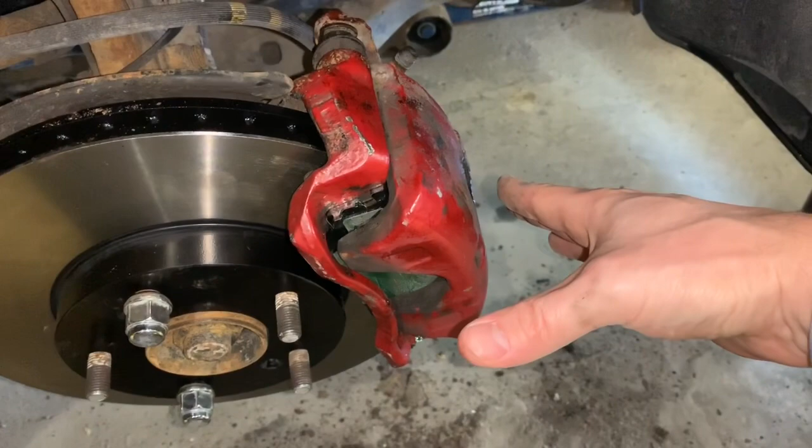So the caliper is back in place. So we put our two spreading wires that help spread the pads apart. So you have the one on the top and the one on the bottom. So I put those in and then holding the pads closed, slid the caliper over. One thing to keep in mind when you look at the caliper itself and the slide pins, on the head of the slide pin, there's a flat spot. The flat spot mates up with a flat spot on the ear of the caliper.

So why is that there? That's there to stop the slider or the pin from turning when you're trying to tighten the retaining screw that goes into that pin. So just remember that you got to mate those two surfaces up, flat spot to flat spot, both top and bottom. So put your caliper to caliper bracket bolts in, hand tight, and now we're going to torque them.

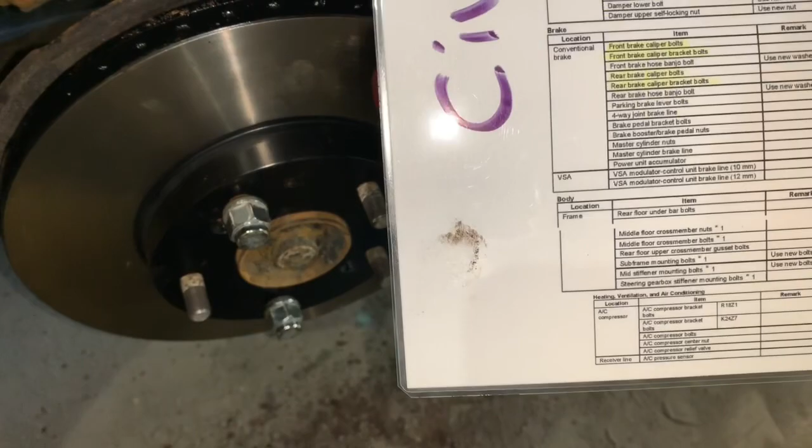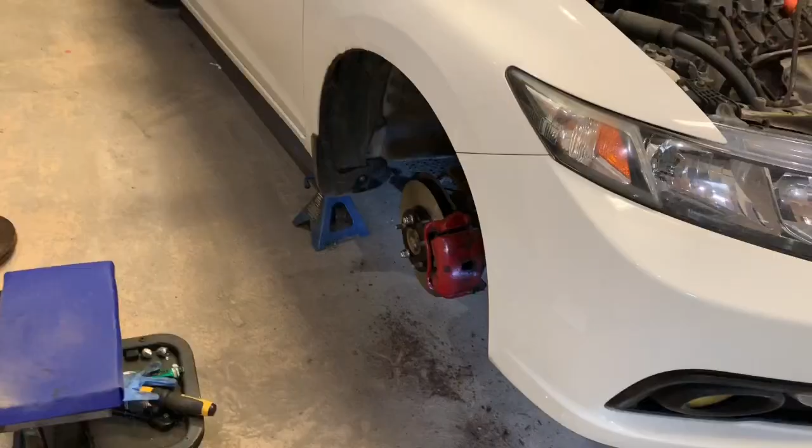So we're going to turn to our trusty torque sheet, and we're going to look for our brake components. So we're looking at front brake caliper bolts, 25 foot-pounds. So we're going to go 25 foot-pounds on both the top and the bottom one. So we're going to tighten up those. So the caliper is fastened. We torqued those two 12 millimeter caliper to caliper bracket bolts to our 25 foot-pounds.

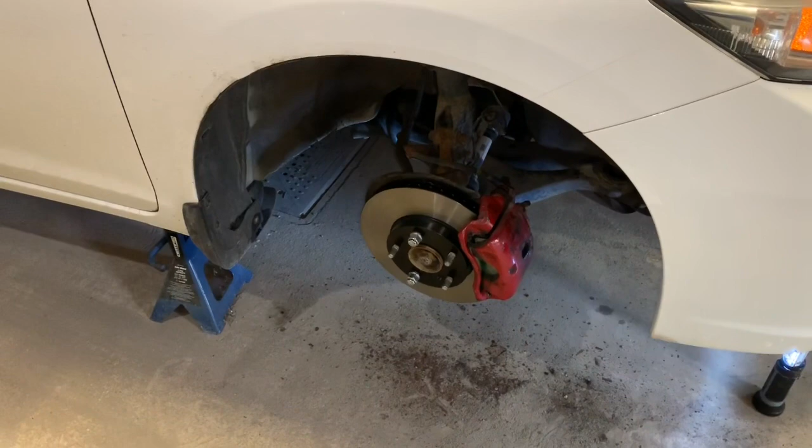The only thing left now to do is put the wheel back on. Honda specification is 80 foot-pounds for the lug nuts. I think that's a pretty good standard for most cars. I know on some of the older cars with steel wheels, these say always 100. But I notice on a lot of the newer cars, they're saying 80 foot-pounds is all that's needed.

So anyways, guys, that's how to do it. I'm not going to show you the other side. That way I could do it much faster and go have dinner. But I think that gives you a good understanding of how to change the front brakes on the 9th generation Honda Civic, 2012 to 2015, non-SI. And it's probably applicable to the 8th generation and 7th generation for all I know, but don't take my word on that. So that just highlighted some of the things to look out for.